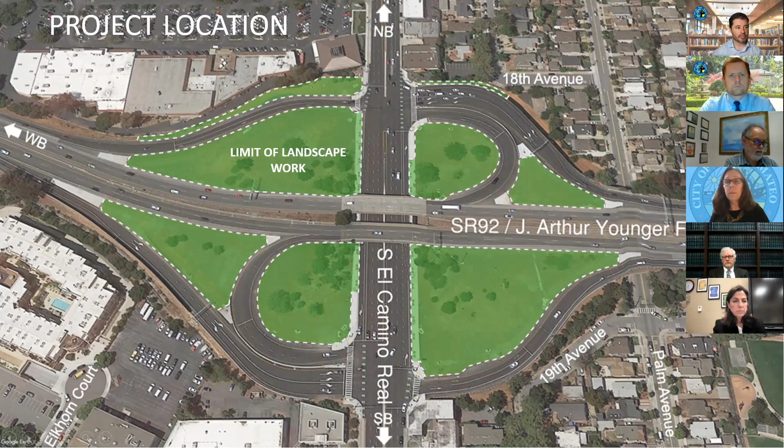At this time, I'm going to turn the presentation over to Chuck so that he can walk you through the details of the project constraints and the landscape concepts, and go over those details with you. So then I'm going to be moving these forward. Chuck, you let me know when you are ready. Oh, okay, I'm sorry, oh dear, I'm sorry. I need to talk about public outreach first. I apologize.

We took a multi-pronged approach for the public outreach. One of the big things we did was a survey online with many questions to solicit public feedback on what they'd like to see - what kinds of trees, what kinds of plants, do they like color, et cetera. So this was a big way to reach people.

This survey was launched in September, closed in October. We had 200 people click on the survey link, and 173 of them actually completed it. The survey was open to the general public, but one question asked respondents to identify which neighborhood they lived in, so we could get a feel for whether there was a difference between the opinions of people who lived in the local neighborhood versus people driving through the interchange.

The survey responses helped guide the content for our new project webpage, which is now available as of November, and is also guiding our work on the design. We utilized all the different social media channels common for the city's practices now, and the city e-newsletter, in order to get the word out to people.

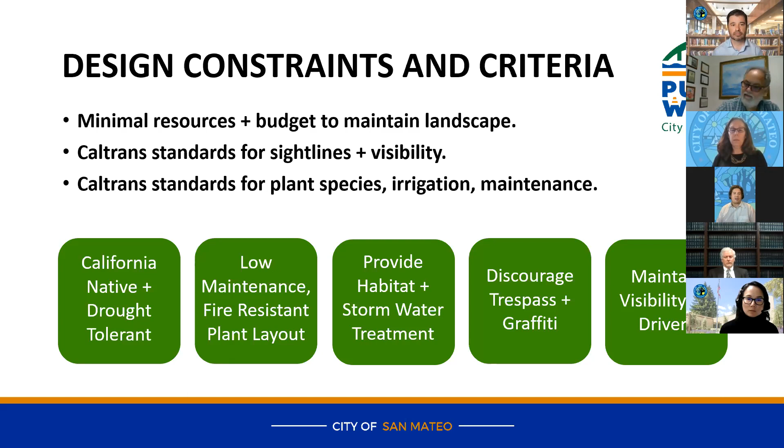From the public survey, a lot of the feedback was regarding using California drought tolerant natives within the interchange, having a minimal planting design, avoiding hazards for trespassing, and allowing for adequate budget for maintenance within the interchange. Sight visibility and low profile plants was another element discussed in the feedback.

A lot of the community feedback was about colorful flowers. We had the coast live oak. Originally we had a Platanus racemosa, a California native London plane tree, and then the western redbud - based on a number of different options provided in the community outreach process.

And based on the feedback, we consolidated everything from the community and then also met with city maintenance staff, and we made some adjustments to the plant palette based on that feedback.

Some of it, originally the screen tree on the left side, the California incense cedar, was originally thought of as possibly a redwood. But the feedback we received was that they want drought tolerant plants, and redwoods are not drought tolerant. So we looked at alternatives that used significantly less water and were able to provide the same screening and aesthetic for the sound wall area.

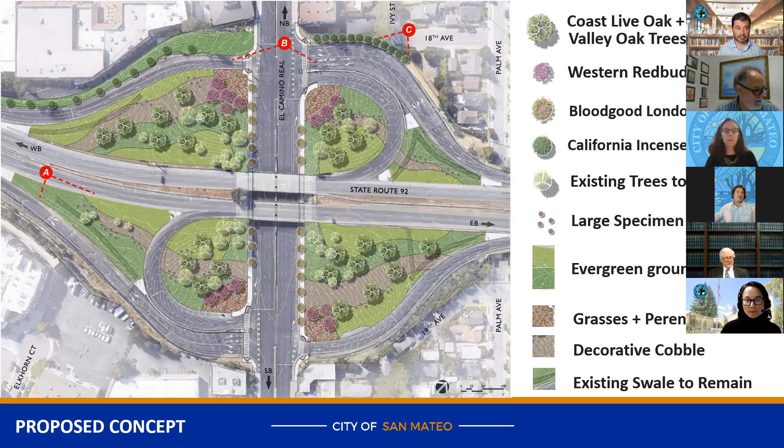So if we go to the next slide, we'll start with slide A. Here we have a rendering looking towards the east, as the off-ramp is just to the right on this photo. We have the coast live oak and valley oak trees within the interchange, the decorative cobble bands, some of the existing native trees to remain, large specimen shrubs throughout, and then low evergreen ground cover that accents the rest of that ground plane within the interchange.

And here's a rendering as we look northbound towards the freeway. We have the off-ramp on the left. This is depicting the established landscape aesthetic, with color accent trees of the Western redbuds flanking each side of El Camino Real with low color planting in front.

We have the Platanus Bloodgood London Plane street trees within the sidewalk area. Beyond that there's decorative gravel and low ground covers. We want to keep a lot of that landscaping very low to the ground, so there's always visual access from any passerby to see into the entire interchange area, so there's no hiding spots created.

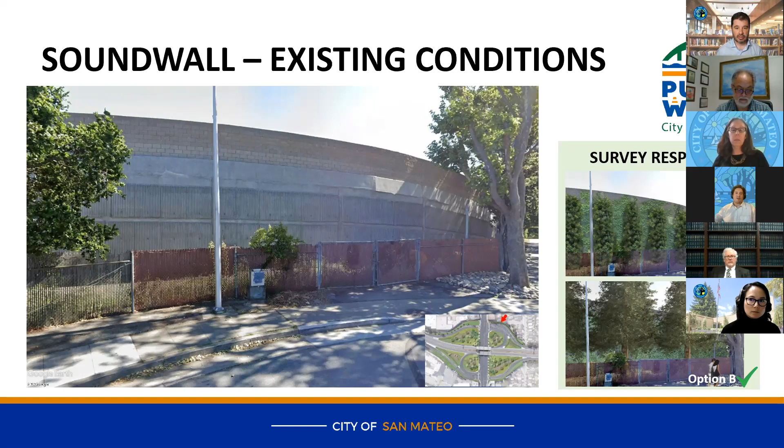We came up with the final rendering for that sound wall piece. Here we had a creeping fig, which is a proven Caltrans vine for sound walls. It attaches to pretty much anything, it's very low maintenance, and it provides graffiti control to that sound wall as well. We would place those on the sound wall and they would grow up and eventually envelop the entire wall. We also have California incense cedars placed in there to provide more vertical screening along that facade, and there are a few existing trees within that area that would remain.

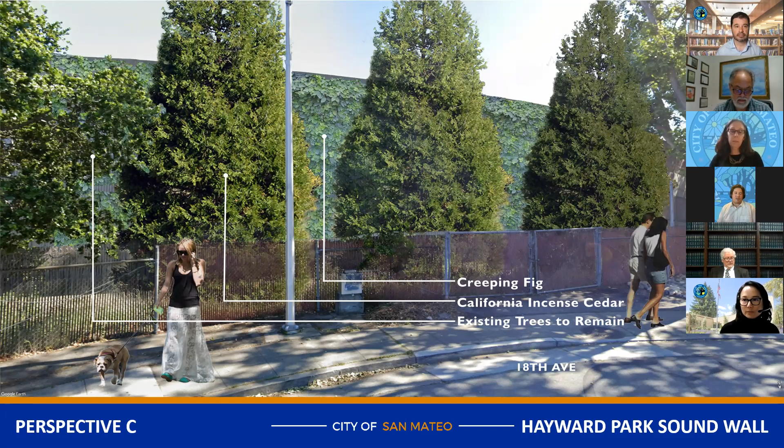So that pretty much wraps up the landscaping presentation and the graphics and the imagery. Thank you, Chuck.

Going forward, what we'd like to do this evening is hear any comments from the council, any questions and any public comments, which we will consider as we wrap up this design concept. After this evening, we'd like to move into the design phase. We expect that to take approximately 9 months, and then look to advertise and award the project toward the fall, completing it by the fall of 2022. So that really wraps up what we'd like to share with you, but at this time we're open to receive comments and questions.

Great, thank you very much for that presentation. Are there any questions from council? I have a question, please.

The design looks wonderful, and I was really happy to see all the efforts to put in native California plants and consider the ongoing maintenance costs. I wanted to also ask about the discontinuation of Roundup and how that might have been factored into the design and maintenance plan. Our city was a leader in limiting and eliminating our use of Roundup, so this is a great opportunity to design around that policy, and I'm curious to hear how that has been factored in.

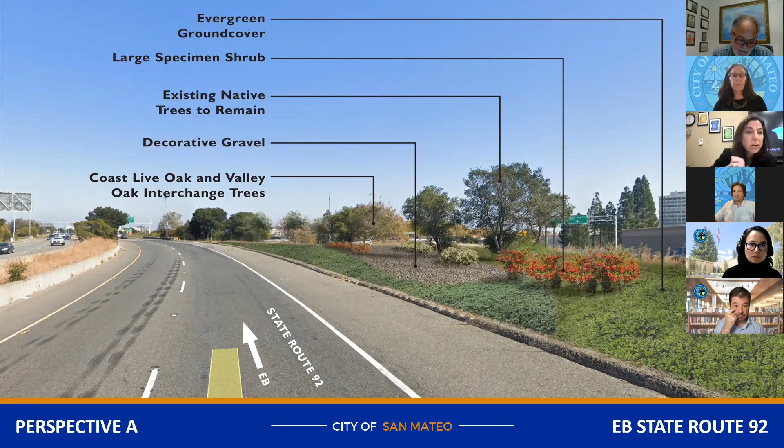Okay, great. So as you're heading west on 92 and you exit to El Camino, the area where you're going to put the conical shaped, I forget what they're called - your incense cedar trees and then the fig - so I have a question. Will those cedar trees grow above the wall? Eventually, yes.

Okay, because both entrances into the city, the first thing you're confronted with is a pretty unsightly sound wall, and that's the reason why I'm asking.

So I was just wondering what could be done. Now, the fact that those trees will grow above the sound wall, that's nice because you'll see some green. I guess my question is, would the climbing fig be allowed to grow over the wall so that we see green? This is on the exit, where you exit heading west onto El Camino.

Yes, usually that will have to be specified within the maintenance agreement. Something we're currently doing on another Caltrans project right now is we are planting vines on the Caltrans right of way and actually coring little holes through the sound wall. It's a pretty standard Caltrans detail, and it lets the vines grow through the sound wall and screen the other side as well. The challenge here, and this will have to be a discussion with Caltrans, is the actual maintenance and safety related to that. Being on the off-ramp, it's a little easier than within the main travel way. But we can have that discussion with them.

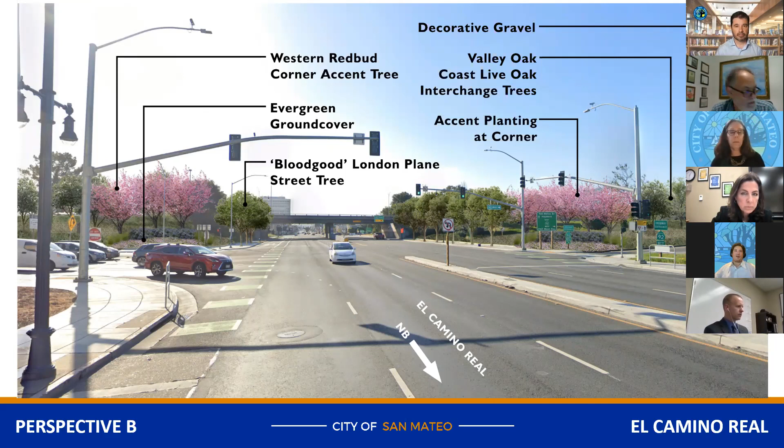There's some little spaces that are available that we can landscape and include as well. Yeah, okay good, that's nice. Thank you, those are my questions.

Anything, Councilmember Goethals? All right, I'm going to open up public comment. Madam Clerk, do we have anybody that would wish to comment on this item? I do not have any raised hands at this time. All right, I will close public comment and bring it back to council for any final comments.

Just one from me, Eric. Diane earlier was mentioning the area between east and west 92, but at some point Kathy spoke about the area underneath the bridges on El Camino where we have walls. And I was wondering what, if anything, are we doing to discourage graffiti on those wall areas, on the bridge abutments?

With this particular project, I do not believe we have any proposed landscaping underneath, but that is something we can talk to Caltrans about and see if there's any way to extend vines underneath that area as well, if that's desired. Well, it doesn't have to be landscaping, it would just be some way of discouraging graffiti or making it manageable, one or the other.

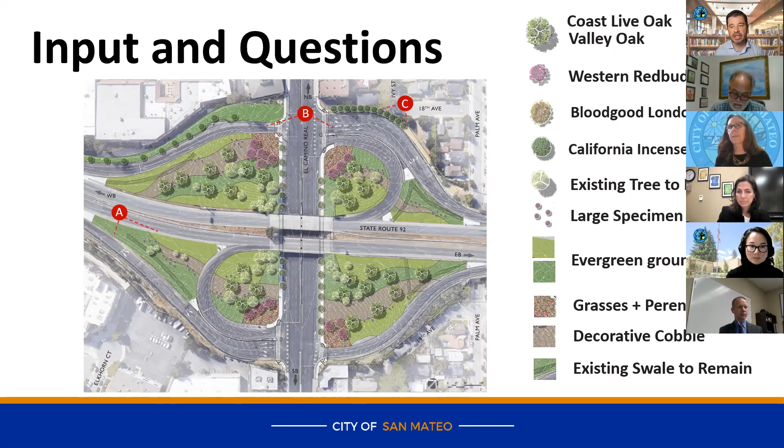Great, Councilmember Goethals? No, I will just echo the comments we've heard. So many San Mateo residents and non-residents pass through this corridor, and I'm really excited for these trees to get to fully mature. If they look anything like the mock-ups we're seeing, I think we're all in for a big treat. Thank you so much for all of your hard work on this, and I just wanted to make sure you got everything you needed from us before I move on to

the next item. Yes, I believe so. Thank you very much for the comments, they're very helpful to guide us. And we look forward to bringing that into the design and providing some responses of how things go with Caltrans as well. Excellent, thank you. All right, we'll move on

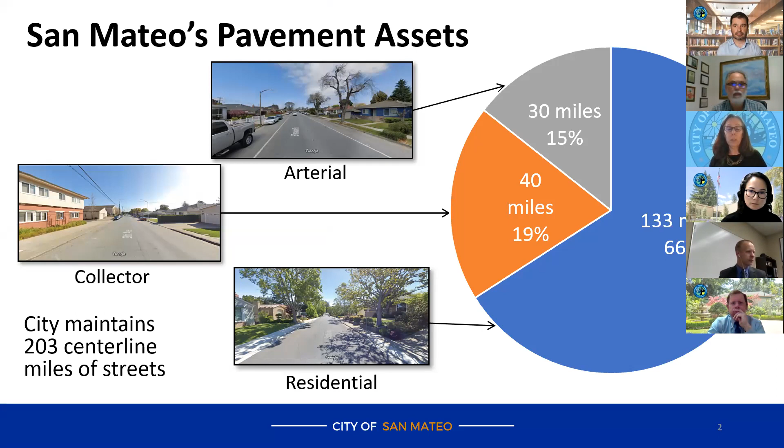The Pavement Condition Index, or PCI, is a metric we use to describe the condition of a roadway section using a numeric scale. This index ranges from 100, representing new pavement, to 0, representing a failed roadway at the end of its useful life. These scores are based on the extent and type of defects within a pavement segment through visual inspection. The condition categories of very good, good, poor, and failed help guide us in selecting treatment methods appropriate for the roadway segment's condition. The numeric limits for these categories aren't fixed, but are something we've established and try to stick to, providing guidance as to when a more substantial treatment method might be required.

I also want to point out that the PCI index is not a drivability index. It's supposed to represent the technical condition of the pavement, not a drivability condition. So a failed street doesn't mean it's undrivable—it means it's getting toward the end of its useful life.

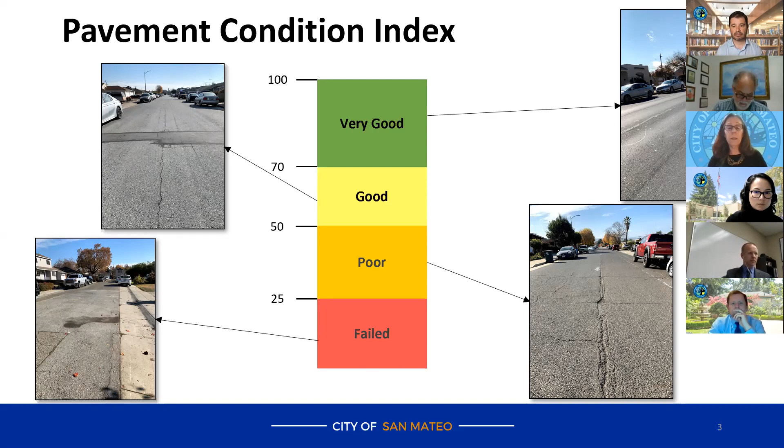This graph illustrates the rate of deterioration of pavement over time. An arterial, shown here in gray, is more heavily used and will deteriorate more rapidly than a residential street, which may last longer. As pavement becomes more deteriorated, it becomes more expensive to restore. For example, a maintenance treatment such as crack seal or slurry sealing is appropriate for pavement in the very good PCI range, and is much less expensive than once we reach the need for rehabilitation or reconstruction. So it's important to protect pavement early in its useful life using less costly treatments.

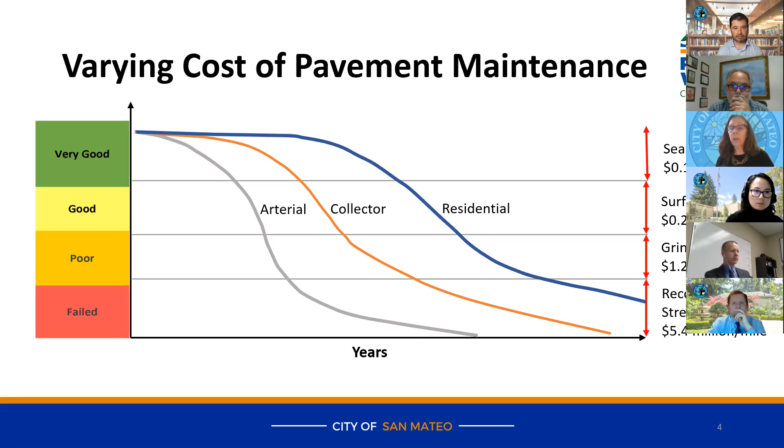To further illustrate this point, consider a representative arterial street. If a street doesn't receive maintenance treatments and is left to deteriorate, it will become failed in about 15 years or so. In that condition, it would cost approximately up to $5.4 million per mile to reconstruct that street to a new condition.

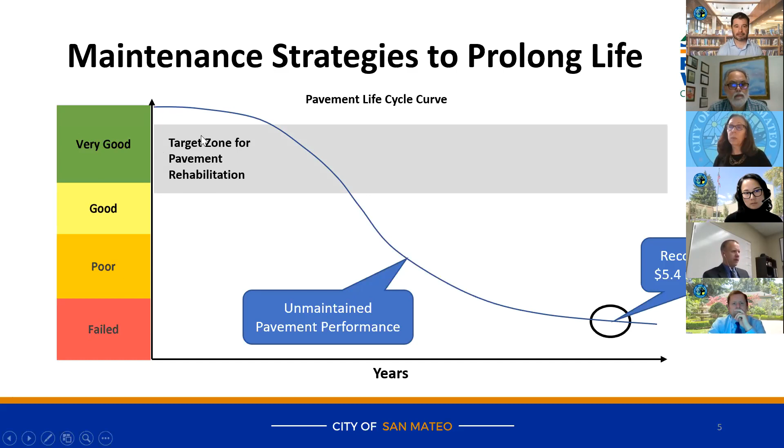Whereas if the pavement is maintained while its life is still in this target zone for rehabilitation—for example, if we treat it with a slurry seal while it's still in the upper category—you bring it, not quite back to 100, but fairly close to 100. So you've kind of restored it, and that increases the pavement life. It actually buys more time and shifts that curve over, which makes it cheaper to rehabilitate.

As it deteriorates again, if we catch it while it's still in good condition—let's say this time we do a grind and pave—that might be on the order of $1.2 million a mile. What this shows is that over the same time frame, instead of letting pavement deteriorate all the way to a failed condition and spending a large amount reconstructing it, if we keep funding our maintenance program, we can spend, for example, only $1.3 million to maintain that same segment of pavement.

The important thing here is that in that scenario, the pavement has spent most of its life in the good or very good range, meaning it's a nice street in good condition. Whereas if we don't maintain it and just wait until it runs out its whole life, a good portion of that life ends up being spent in an undesirable condition. This illustrates that spending money on maintenance prolongs pavement life, reduces total cost over the same amount of time, and keeps the road in good condition longer.

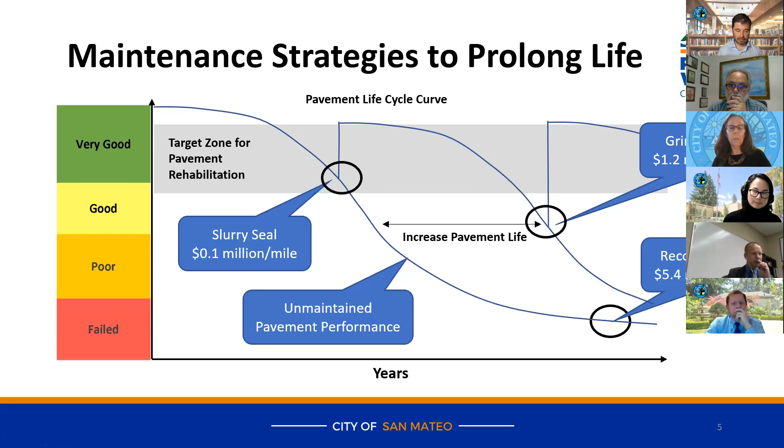There are two programs currently active that we're using to address street pavement. One is the Smooth Streets program, which is focused specifically on repairing failed streets. This program was incepted in 2013. It helps support the council priority to eliminate failed streets, and it's funded in part by the Measure S funds that were voted for this purpose.

At the time, there were 22 miles of failed streets: 17 miles were failed, and 5 miles were in an at-risk category, meaning they're poor and at risk of becoming failed if we don't do something with them. Since then, we have completed or currently have in construction 12 miles of failed streets, and completed 1 mile of the at-risk streets. What's left is 5 miles of failed streets and 4 miles of at-risk streets. The total estimated cost to finish the remaining program is $27 million, and our planned completion is by 2025.

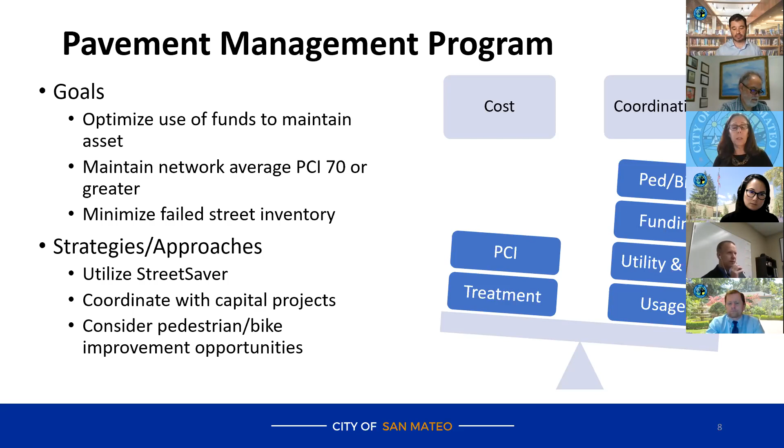Looking forward, I'd like to present some comparisons of funding strategies. This is just a few scenarios to illustrate the potential outcomes from different levels of funding we can put toward our program, and strategies over a 15-year planning horizon, starting to illustrate what happens when we spend different levels of money.

So if we stick with that level of funding over time, eventually you're going to end up with a lower average PCI and a lot more failed streets—about 22 miles of failed streets is predicted.

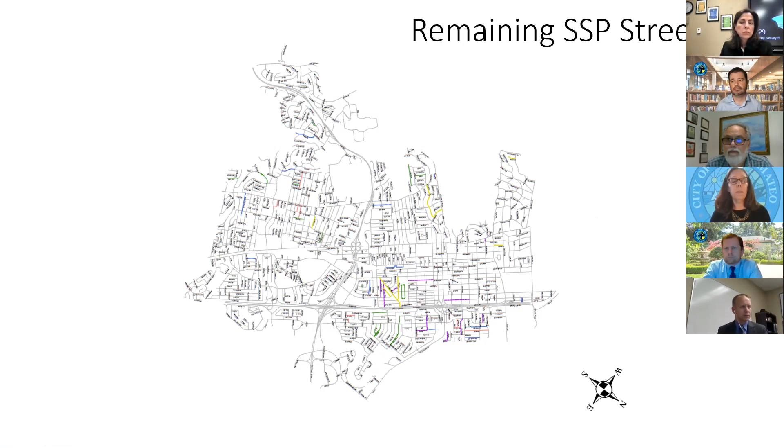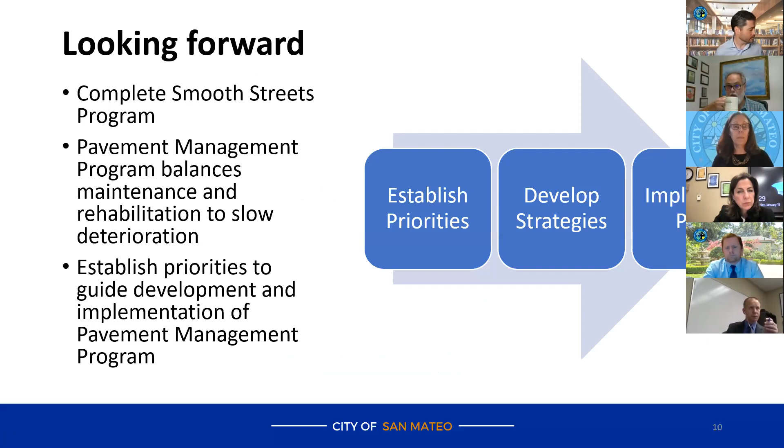I'm wondering if you could go back a couple slides. Let me go back one for sure. One more, please. So when I look at this presentation, what I see is the difference between eliminating failed streets and maintaining this average PCI is 22 million.

But then if you go back a few slides, you told us that to repair 1 mile of a failed street is about 5 million, right? Somewhere around there, 5.5 million? Yes, that is for a typical arterial street.

So it's larger. I was trying to look at a 1 mile segment of a typical arterial street, which is kind of the most complicated ones to fix. So that is more of a cap. And depending on the type of treatment that we can use to fix the street, sometimes we try to plan for budgets that are considering reconstruction, but there have been streets where we've been able to repair them without having

to dig up the entire street, and we do a thick overlay. And so that does help reduce the cost. So that's why those numbers are different, the 5.4 million is kind of a cap, and this is more of an average.

Okay. Well, I think what I'm getting at is when I see the difference here between eliminating failed streets and maintaining the average, there's a difference of $22 million, and that's over a 15-year period, right? From 2025 to 2040, is that what it is? This would go through 2035. Okay, so from now until then, okay.

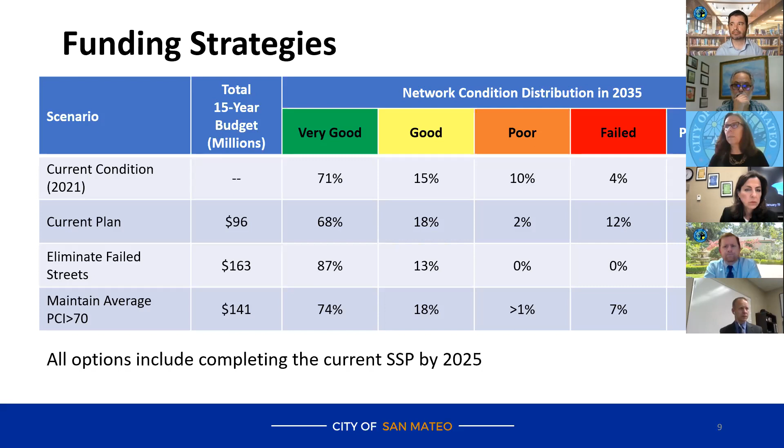And those are tens of thousands of homeowners, tens of thousands of residents in San Mateo? No, these are the number of center line miles of street. But the people who live on those streets represent thousands and thousands of people. Yes, probably, depending on how close together the houses are.

Yes, it would. And when was the last time that we spent any money at all on their streets? That depends on the individual street. But doesn't it follow from our policies over the last 40 years that we haven't spent any money at all on those streets because we've been focused on pavement condition index?

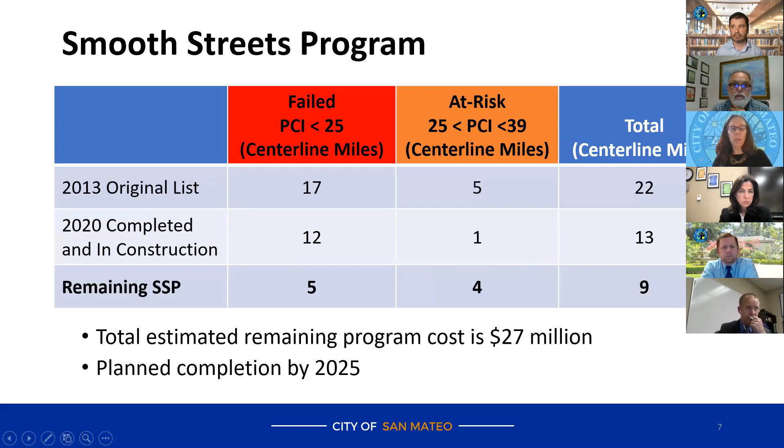So we've got 5 and 4. That means we're targeting 5 miles in here and 4 miles in here. And we will fix those and they will move up into the green category.

But at the same time, because we don't have enough money to take care of everything basically below 90, it means some of these are going to continue to deteriorate. They're going to continue to slouch down this path, and so they will eventually get into that failed category.

So the Smooth Streets program is doing a lot to address all those streets that were failed in 2013, bringing them up into a good category, but there's still not enough money in the overall ongoing program to then keep the rest of the segments from continuing to degrade.

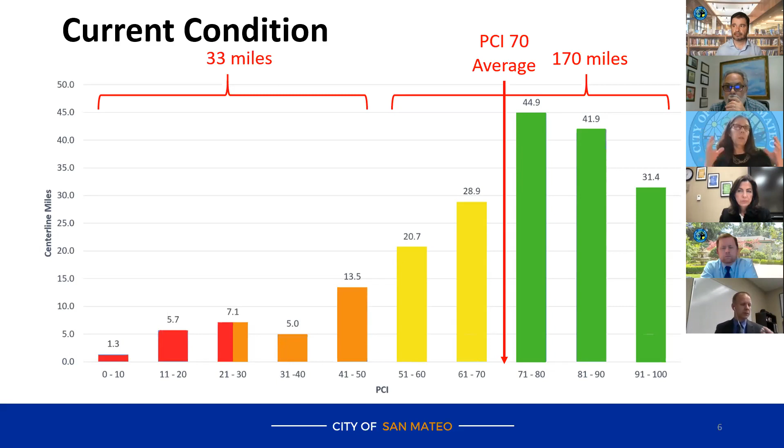And so that's kind of the overall point of this—unless you're spending a high enough level of money to not have any deferred maintenance, you are going to not be able to fix everything because you're going to be spreading your money.

When we do the pavement management program, a little bit does go to the at-risk streets. In fact, this last year we tried to put more toward the at-risk streets to see if we could get even more caught up, but that means maybe some of these green ones become yellow. So it's a balancing act to try to average out and keep these up.

So that was the only clarification I had. And Kathy, I really appreciate the nuance of your response—your response is perfect, and I understand it. I do understand your request for more money in order to get to where we want to go. So thank you very much for your responses to my question. I hope my clarification was helpful.

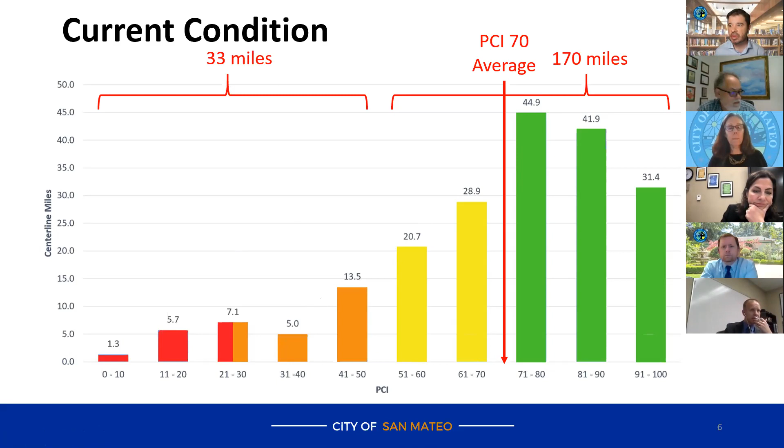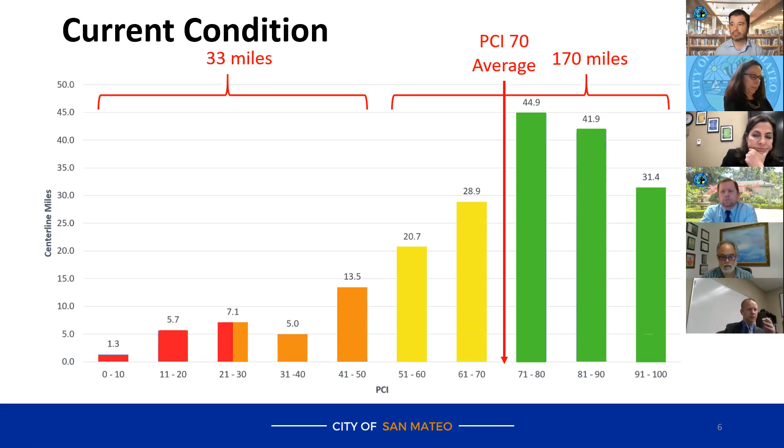Okay, great. Thank you, City Clerk, and good evening, Council and staff. Adam Lorraine, I am a Sustainability and Infrastructure Commissioner, but I'm speaking as a private resident who happens to enjoy sustainability and infrastructure tonight. I would like to thank Public Works for this presentation, very well timed after a recent discussion of Public Works projects that have been identified to council, and of course projects from other departments as well.

Very informative. As a resident and taxpayer, I can see the value proposition of smooth streets, and I support smooth streets for that reason. And I would be inclined to support more money toward the pavement management program in the future, post smooth streets, for the same reason. It seems pretty clear to me that this is a long-term investment, not just in our streets, but really in the value we get from the funds we can allocate toward maintaining these streets.

So it's kind of a win-win, where it appears to me from the presentation that the city is saving money in the long run by continuing to maintain our streets at a higher level. It also seems to be diminishing returns if we were to discuss removing funds from this program to put toward other projects or initiatives. We would end up costing ourselves money in the long run by doing that, and so we get less bang for our buck overall, perhaps, if we do this.